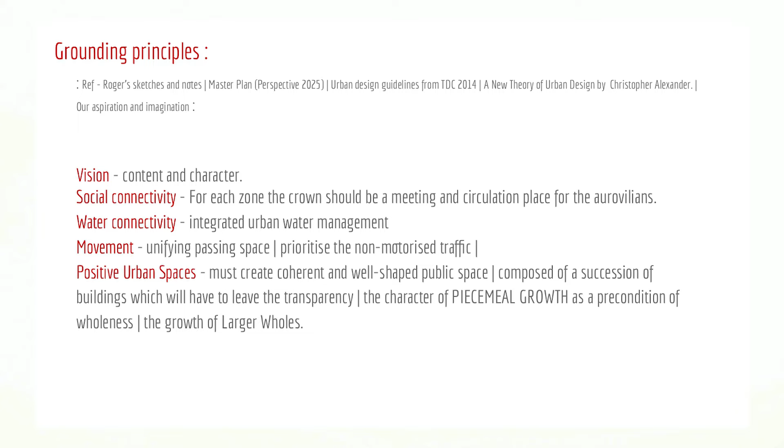Starting with the grounding principles, more about the content and character, which is not only about the road along the crown, but all the projects that come along, the spaces that come along, social and water connectivity, because we have emphasized a bit on water in our coming slides.

Movement, we're looking at this more as a unifying passing space and not as heavy traffic on the crown. And looking at the urban spaces, we are basically saying create more coherent spaces and let the projects or activities which come along the crown relate to the larger whole, and not look at it only as piecemeal in itself.

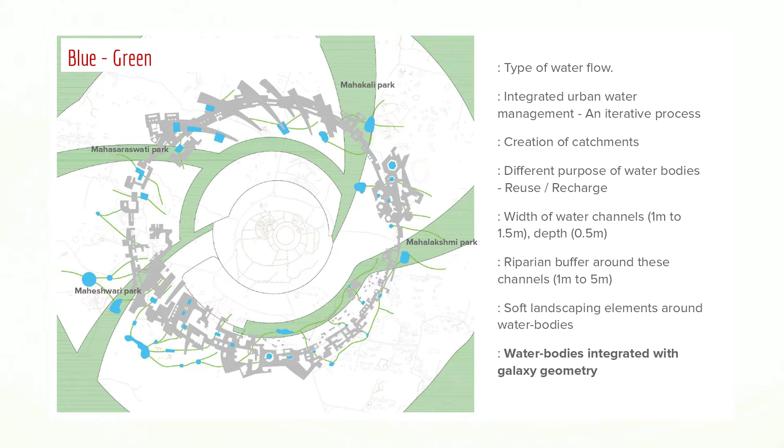I won't go into details because we touched upon this last time quite a lot. Just a quick thing, we looked at the water flow, the way it is flowing, and according to that we kind of created different water catchments. These could be either reused or recharged depending on the kind of development around. The idea is to create soft landscaping elements around those water bodies so they're not left alone, but maintained properly.

Based on the feedback last time, we tried to look at the geometry and put the water along that. So what you see here looks very rigid as a form, but when we go into the details it will look a little different. Anyway, we're looking at the galaxy more as a geometry, and we've been so flexible all this while, so we have taken little liberty.

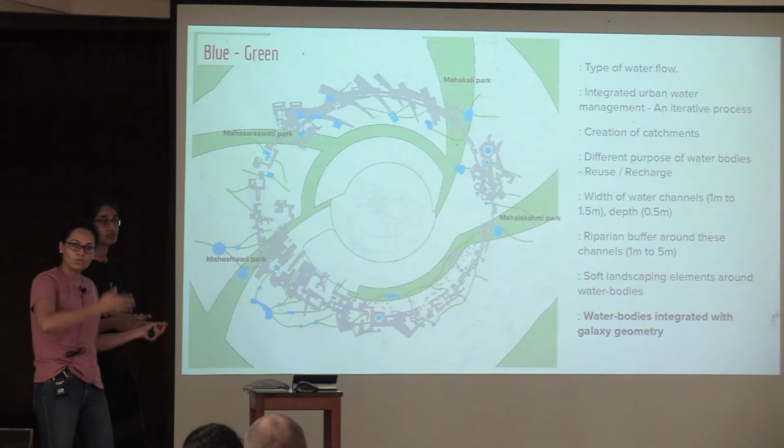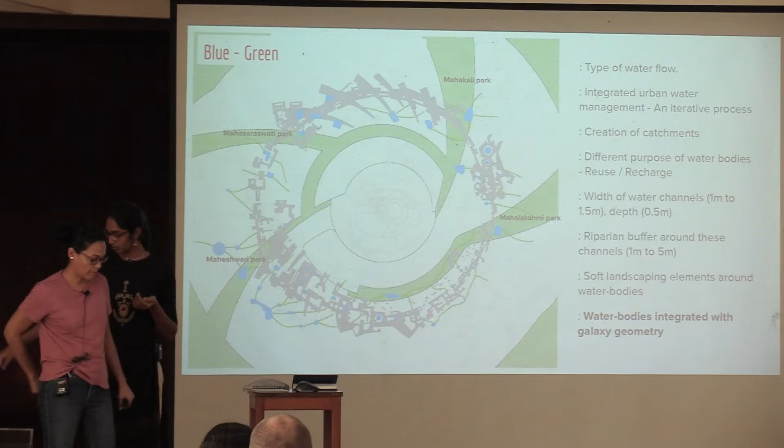Somebody pointed out in the morning that the water in the galaxy is looking different, more flowing and everything. So what we can do is move towards that, because we will be having more density and the runoff will be much higher. So we will work out a different strategy that will evolve as we are developing.

On movement, we won't go into the details because Fabian has already touched on it. There is one thing, looking at the crown more as a continuous experience and less of a vehicular one. You will see that different details we have worked on would actually show more of that.

The place where we have done it differently is here. We are not making this motorized at all, but going around it, and we'll come to that when we are actually detailing out that stretch.

Just a quick thing, sector 3, 4, 5 in the residential zone is cycle path only. Then we continue as a vehicular road. Through Darkali, till the end of that little radial coming in here, is only cycle path. This is Darkali. Going further here was again vehicular. Sorry, I'm so used to saying motorized, but I think vehicular is the better word.

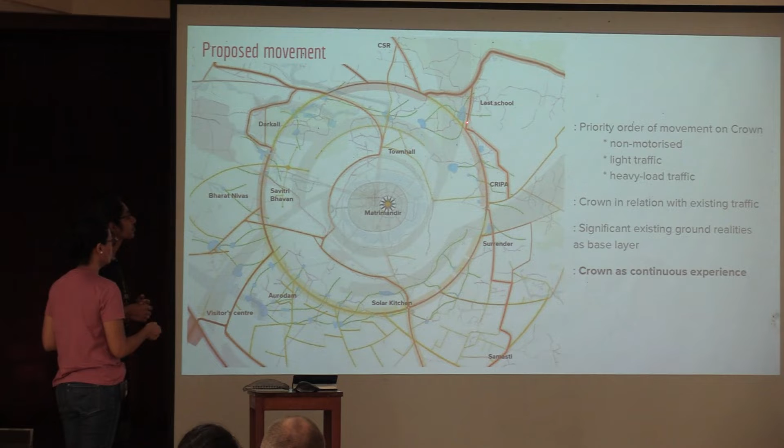But also we had said that we could try and time out the access to this, and in the evenings throughout the night till early morning it could be closed for vehicular traffic, so that at least evening life could be experienced without much cost involvement.

So looking at the human experience basically, the kind of spaces we've created all along, we're trying to see how we can experience the crown. When you come to the junction of Matrimandir Visitor Center, there are tourists there, and also a kind of diversity where it's an initiation for many people. Going further is the archaeological site, so it's a kind of connection with the past.

Then you pass through Darkali, which is basically about being with nature, building a relationship with nature, different forms of life. Going further is a kind of exchange - there is trade, this is the industrial zone. So trade of nature, there would be a lot of learning spaces, interaction spaces.

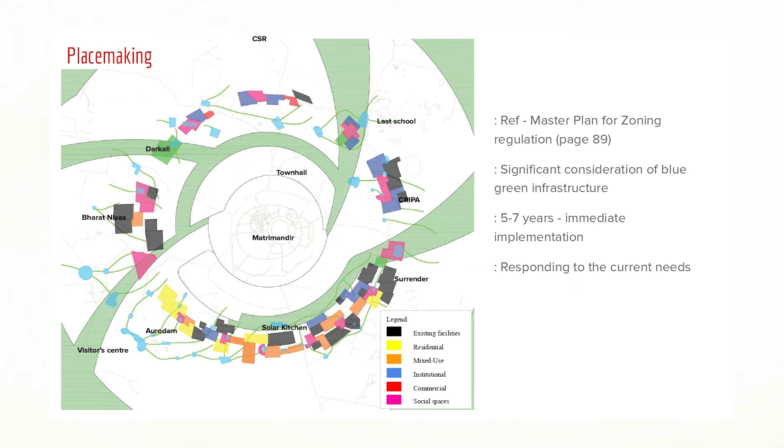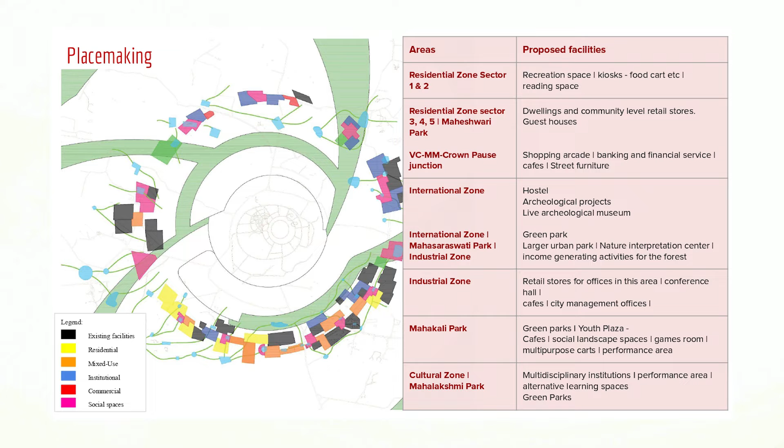We had basically said that we are looking at only 5 to 7 years. We've referred to the master plan document and Roger's sketches, and looked at the current needs also. These are different proposed facilities that we touched on in last presentations, so I won't go into details. We picked a few which make more sense in the next 5 to 7 years that can be immediately implemented.

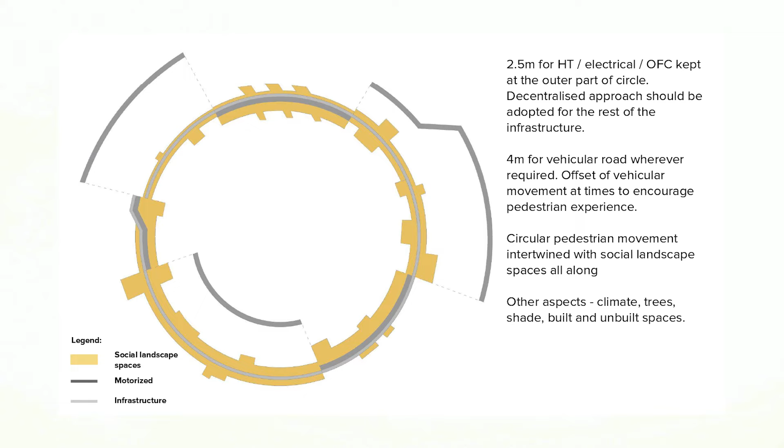Last time we tried to look at 16.7 meters as right of way and worked around that. Within there was flexibility that we had kept between 2.5 and 3.1, those numbers you all know. We tried to rearrange them, and the aim at that time was to see how we could give social landscape spaces more priority. That still remains, but over the last 2 weeks we had detailed contemplation and also a lot of feedback that we got last time.

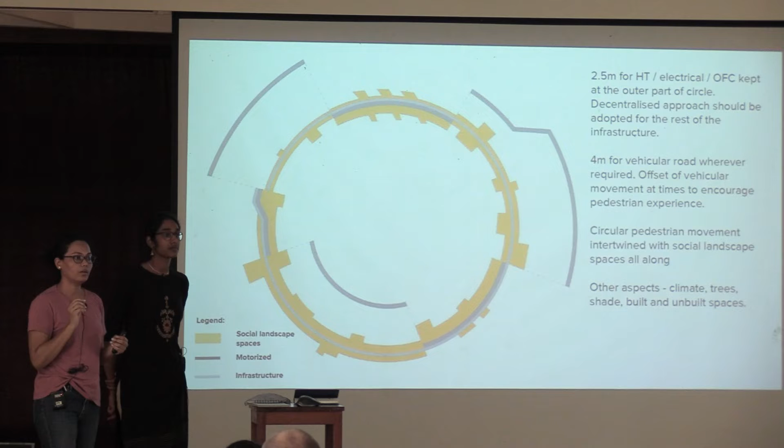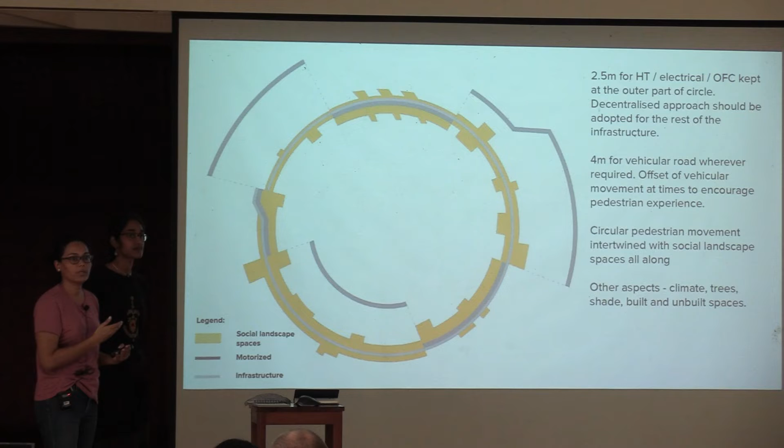Now what we're trying to do here is actually fixing 2.5 meters as the infrastructure corridor, mainly for the HT and LT line and maybe OFC also, because we need that ring as per the electrical master plan, so that could remain there. But we felt that to give the kind of experience we're talking about, if we clear out that 16.7, we are losing a lot. That also got confirmed by the presentation we had, so basically we do the other planning first, and infrastructure would fall in place according to the planning that you make.

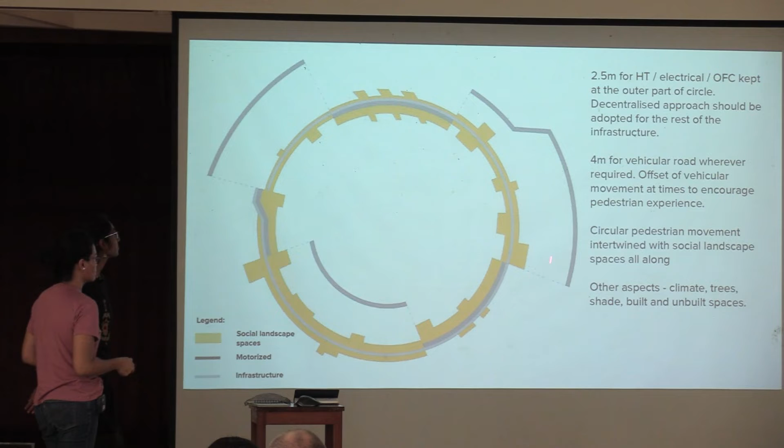Assuming that water and wastewater would be decentralized, they would still have a place in that 2.5 meter ring where you could at times plug in and facilitate along the crown. What you see here is basically the darker gray, which is vehicular at 4 meters, and that's not always along the crown ring—it is going in and out. This is of course conceptual, so it's at times in, at times out.

The other aspects we are trying to cover this time are through different plans and sections of many of these, where we are looking at the climate, looking at the microclimate, appropriate trees, and placements for shade, for built and unbuilt spaces.

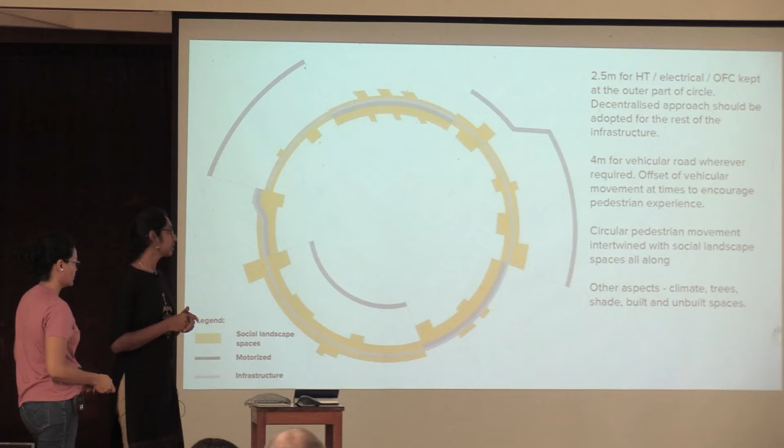The main essence of it is that 16.7 was constraining us a lot and creating unnecessary challenges. So what we try to do is keep that flexible, and like somebody mentioned, widen the crown even more—the crown is more of a people experience. So we give more emphasis on people's experience here. That's why the social landscape spaces are way larger than just the passing space. We try to create social landscape spaces every 200 meters, so from any point within a 5-minute walking radius, you will land up in a resting space.

So to start with the residential zone, sector 1 and 2, which we connect with a lot—in this area we try to see first how the sun is affecting the area, and if we have a wider road, how that is actually affecting it, because we experience it every day. With the 4-meter road, which is already existing, and then there is a 2.5-meter infrastructure corridor that will go, the rest of the space on the other side becomes a space where the buildings are set in, set back, and create spaces and all those things.

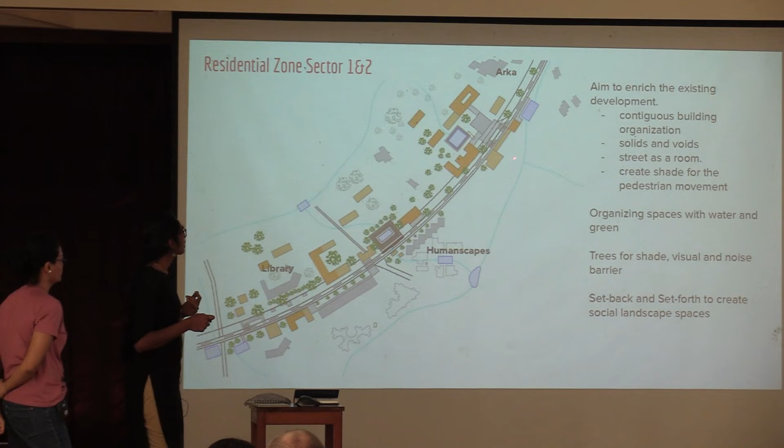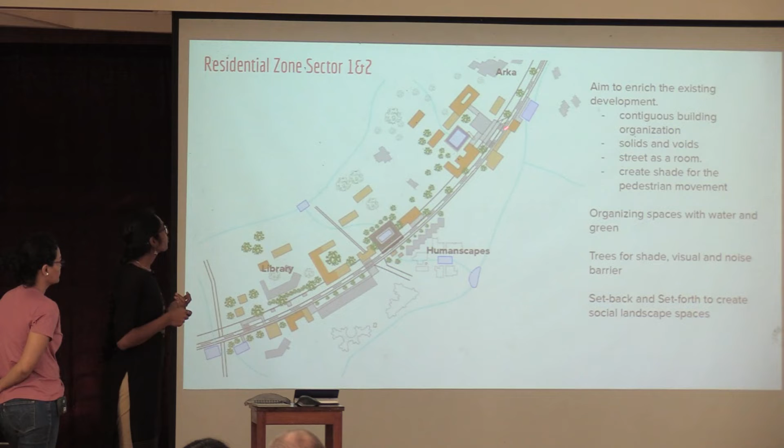Here if you see, there is a courtyard-like space which we also tried to get from the galaxy—there were nice courtyards falling on the center of the crown. We tried to create those kinds of things with shade elements. For example, this is the road that we said will close after 5. There are several of them in different places, in different forms—when we close them, that space can be taken up by something else, and there can be an activity. So it's really a room in the street.

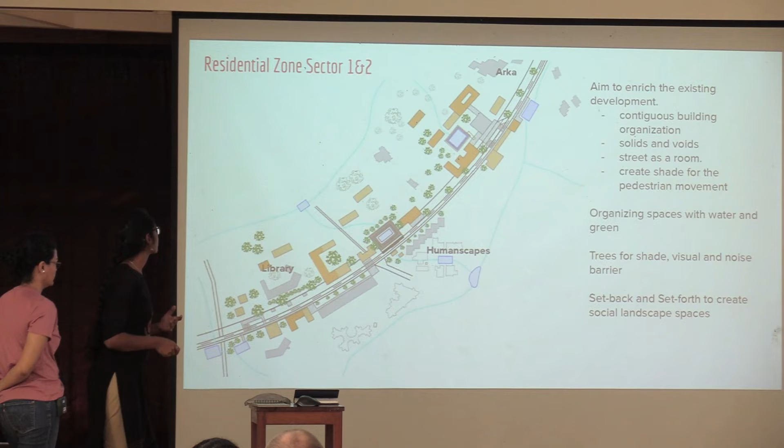As we go along here, this is humanscape, and then there is another water body coming there, and around that is kind of a stepped environment, which is again a seasonal water body. When there is no water, it can be a nice interactive space, with some performances happening and all those things. And here if you see, it sits forward in that space—it does not come on the road but sits forward.

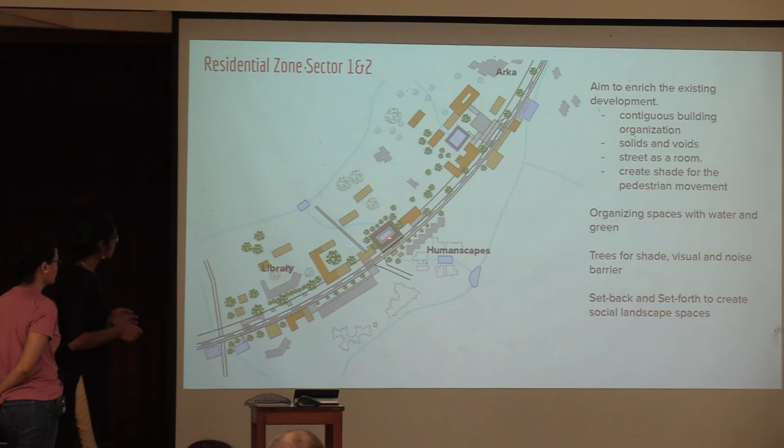So in the evening, the road also becomes like the whole space, and there is no curb that we are thinking of. So here's another courtyard, and then this is Kalpana, and there is a colonnade already going, with some trees.

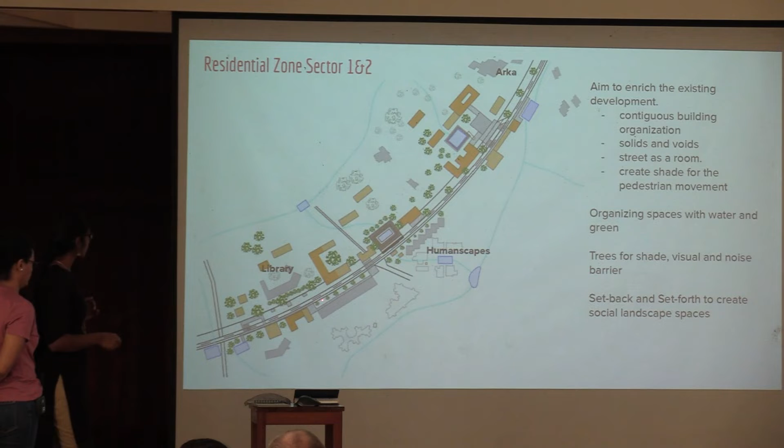Here we second the point that Ganesh mentioned, that instead of looking at avenue trees, we use trees for how they can help, either as a visual barrier, a noise barrier, or to provide shade - all those kinds of things we have explored.

So here is another courtyard. Around evening there can be some small kiosks put up, and it can be totally different, and then it becomes a road again. So that was the idea here.

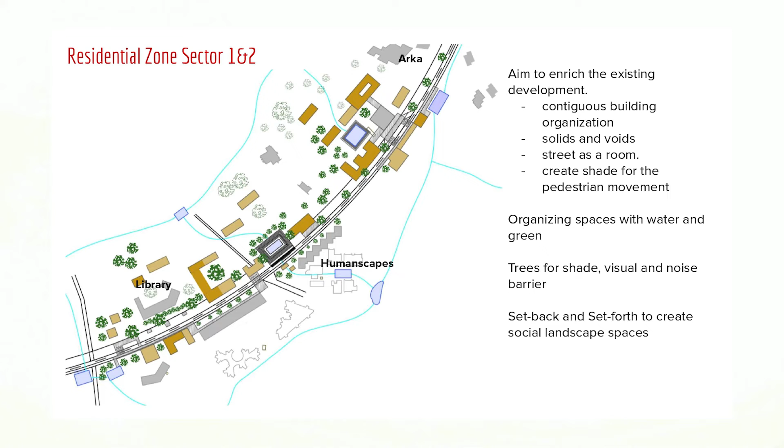In this stretch, knowing that north is up, we all know that this road has always been very sunny. So what's important is to build across and close-knit, have trees that give shade and noise barriers, etc. That's very important climatically, to organize those spaces, to make that stretch of road more usable - like we say, street as a room.

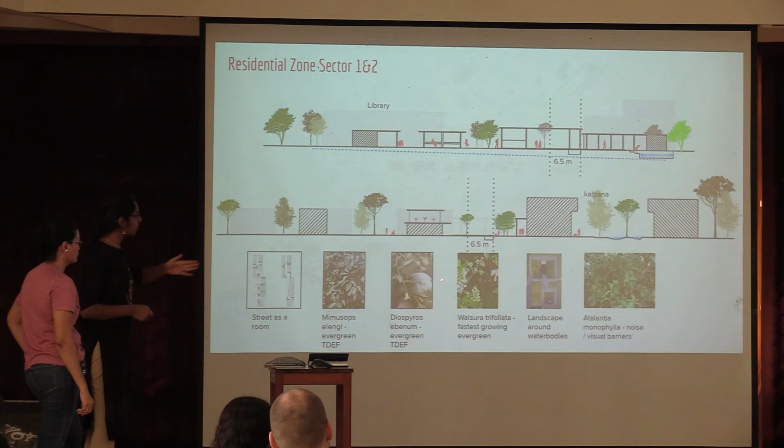That's another exploration. We also tried to explore some of the species that can be used for providing shade, which are evergreen and TDEF species, which you will see here. Thanks to Glenn and Gislin for helping us with that.

Another thing is, in these spaces that we have created in front of Humanscape and in front of Kalpana, during this monsoon there were, for 3 days, water above the crown actually. So that clearly shows that we have not made ways for water.

So here, instead of undoing the road and redoing it, we can let the water flow on the crown, and we make a nice small dip above. So the water is flowing, mongooses can cross, and all those things can happen.

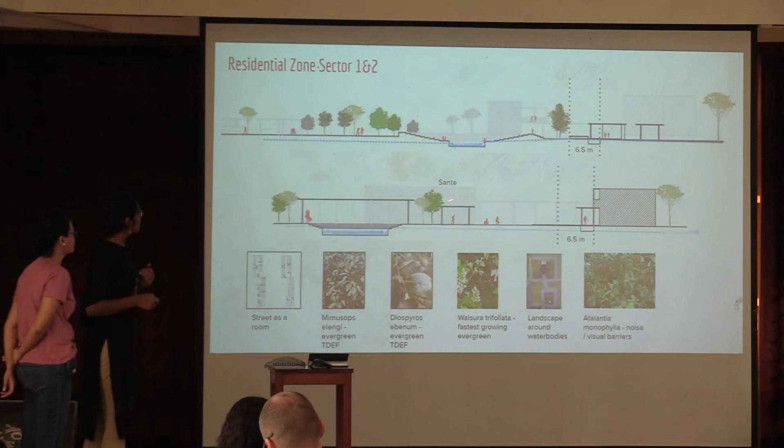This is near Sante. Again there is, in the background, the street as a room happening, and then the infrastructure corridor can be covered with shade elements.

So this is sector 345, and here somewhere is PTDC and solar kitchen. So you see, this is all adopted from the Galaxy model.

And the nature of the social spaces we are providing every 200 meters is not always active - not like something is always happening here. So we are looking at a scale where it's very active, like in sector 1 and 2, to a scale where it's only a simple banyan tree with benches around, where you have a place to sit, introspect, and have your own time.

And there is big potential in these spaces, from today to how it will develop tomorrow, that as the density is growing, as the needs are growing, they can also be transformative. So today it can be very simple, tomorrow there can be active life around it.

So here we are saying only cycle path, and a little raised cycle path allowing the water to go through, because this road doesn't exist now. We're not redoing anything - we can do it as we allow the water inside.

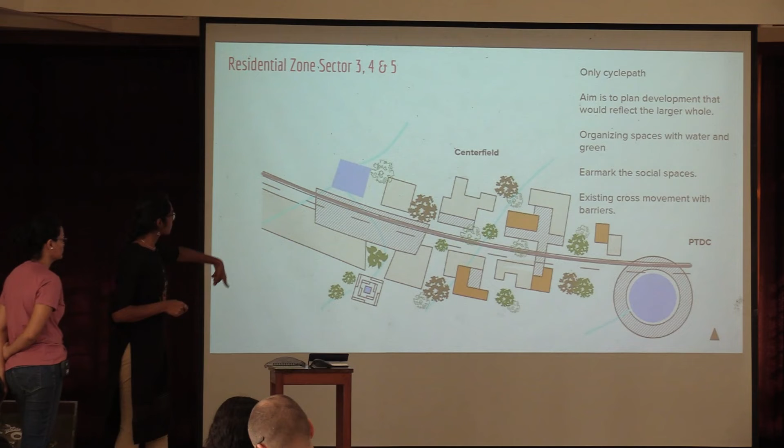And whatever traffic is crossing from here to the communities that are here, the Aurodam and other places, will not be able to cross through or run on the crown. We will have barriers that will cut them off.

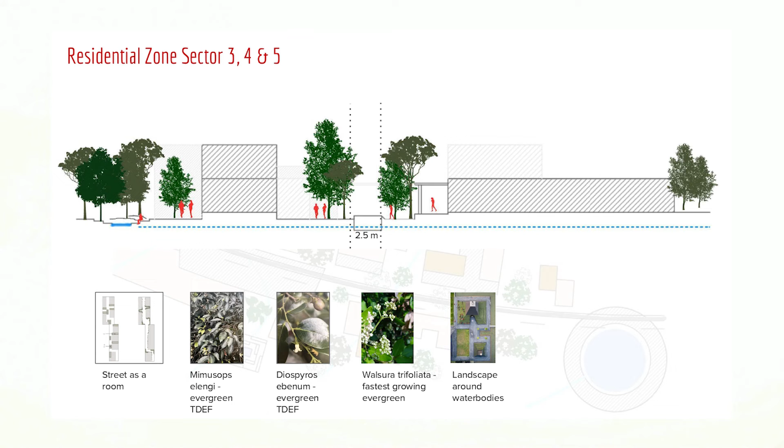Section, and there is a lot that we can do. Here again the water bodies are in and out. As it is along the crown, it can be more active; as it is away from the crown, the nature is more calm, more intimate, and those kinds of things.

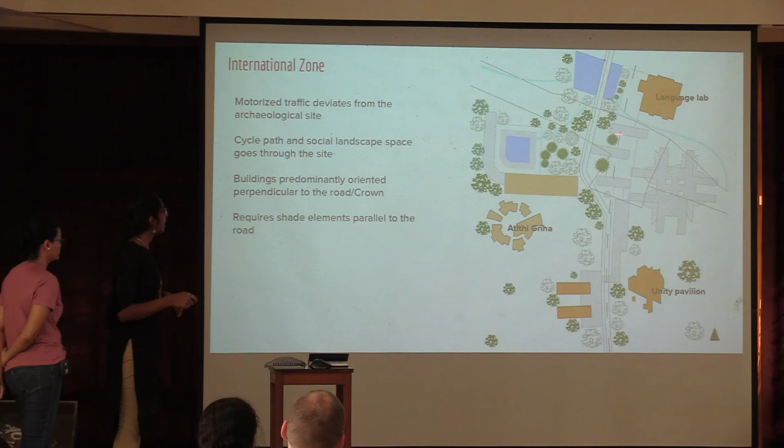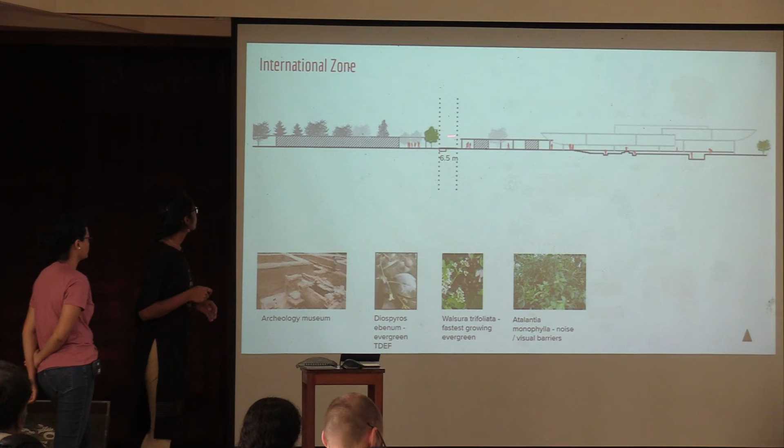So coming to the international zone, we have taken this area from Unity Pavilion to Language Lab, which has a very significant space of the archaeological site. So here we are saying, go to the section - yeah, this is again the 6.5 continues.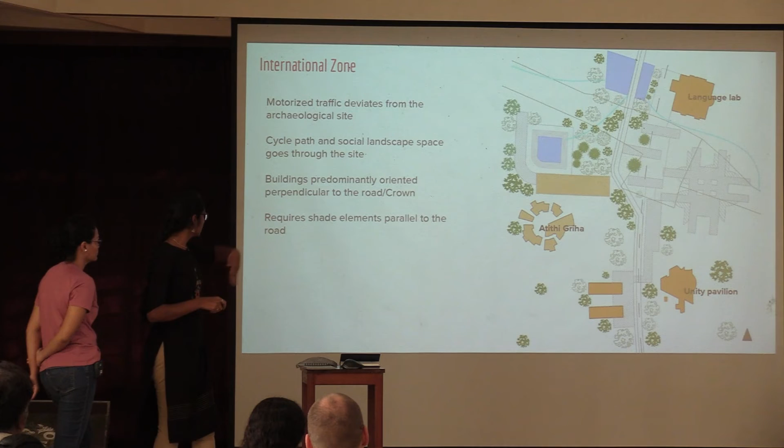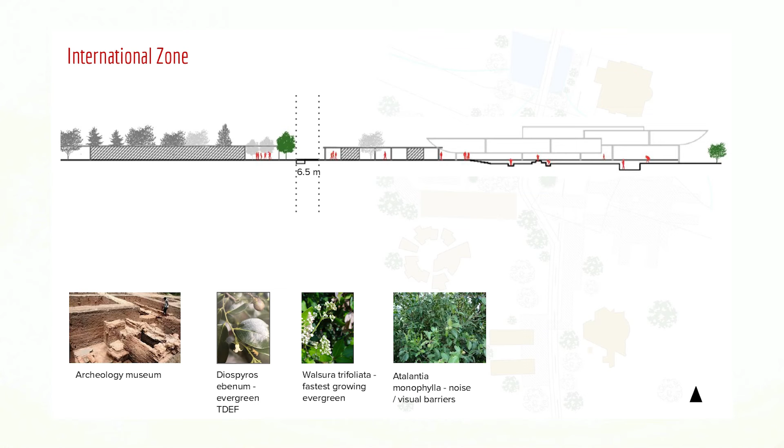The important thing is because we have the area of importance, we have this little deviation of the motorized road, but still the cycle path and the walking experience continues along the crown. This is to respect the area, and we could easily make the archaeological site part of the social space. We have this kind of underground experience with the live museum and everything.

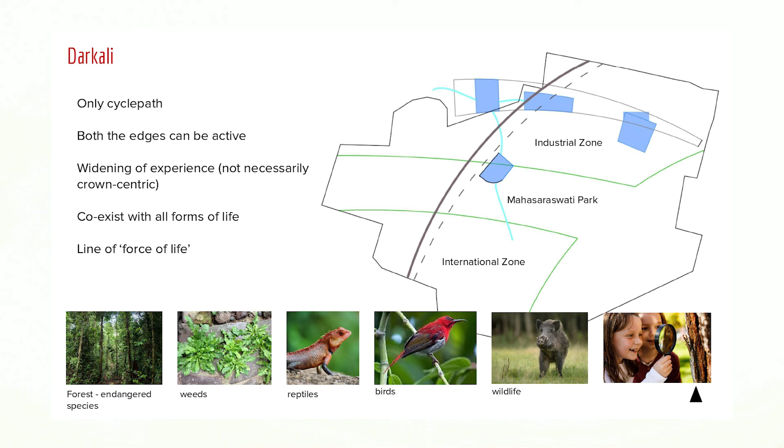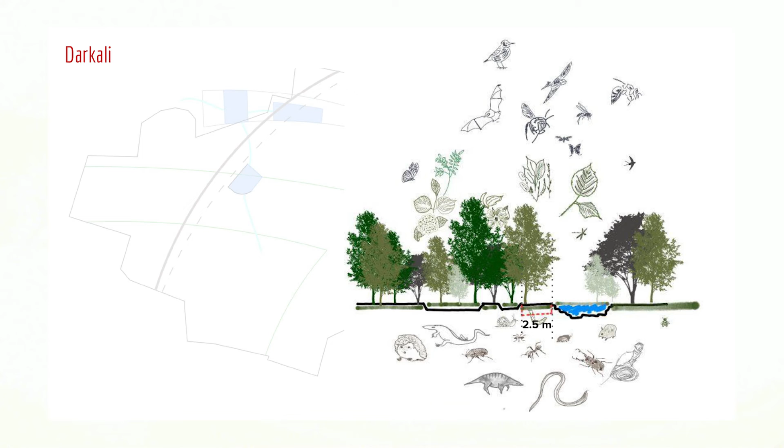So Darkali, as we go, the main idea is to keep the edges active with activities happening in the industrial and international zones, and keep only the cycle path through, because if we do much here we disturb the ecosystem that is there. But it's an enriching experience for us. So we're doing as minimal as possible and trying to coexist with all forms of life, not just trees, because they all play a huge role in our ecosystem balance.

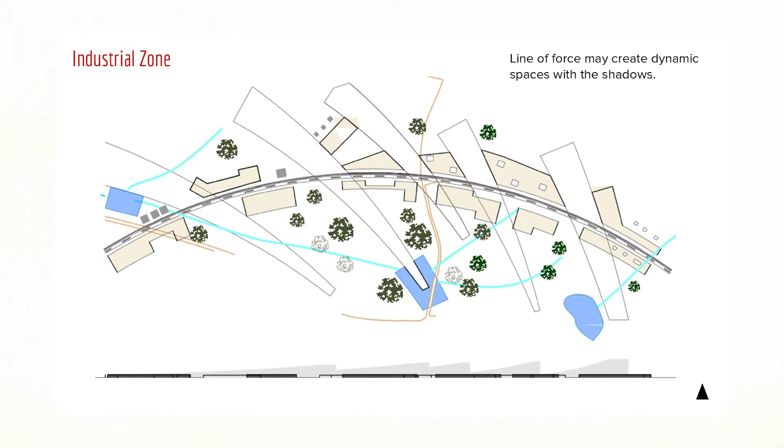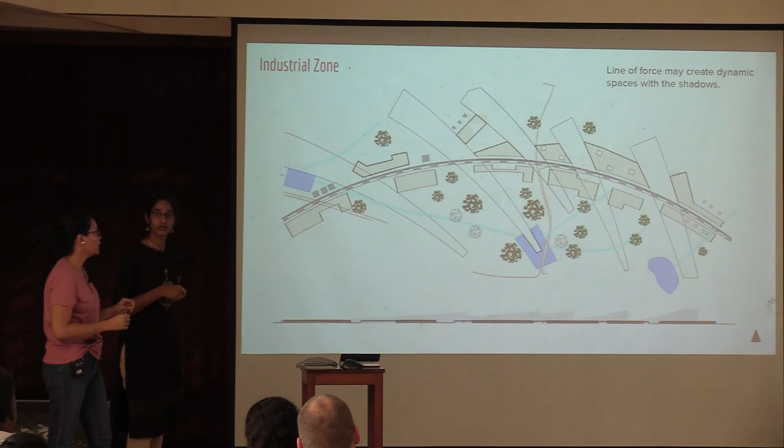Coming to the industrial zone, I think many of you have done this. Don't look at the number of lines of forces, it confused us too since at times it was 4 and at times 6. What we're saying is basically the low-lying buildings along the crown could come up now, and this stretch of road could be developed pretty soon, because along with the interlink that Fabian talked about and the industrial zone access, we could start developing this and give it urban form, since the lines of forces are creating a positive impact on development along the crown.

This is just a skyline that it would create. The way it's shown right now, it's very solid blocks, but if we give the porosity, it can be done very interestingly.

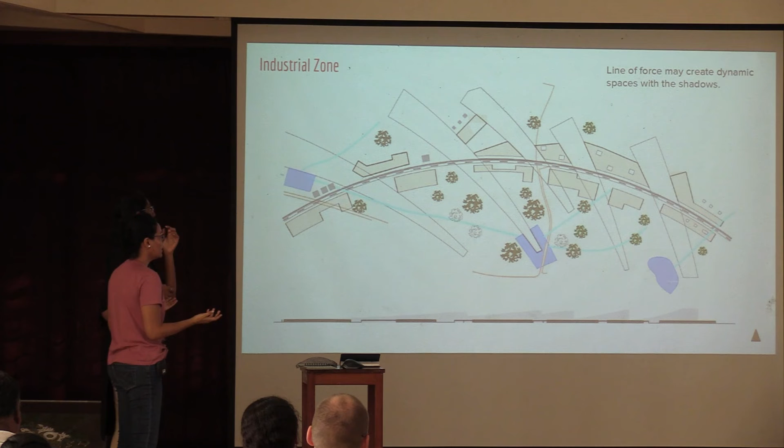So spaces-wise, as we said earlier, we could bring offices and collective spaces which would cater to the industrial zone, like retail stores and courier services, and also borrow from different zones to create a nightlife here, like Shivangi and Radhika had talked about.

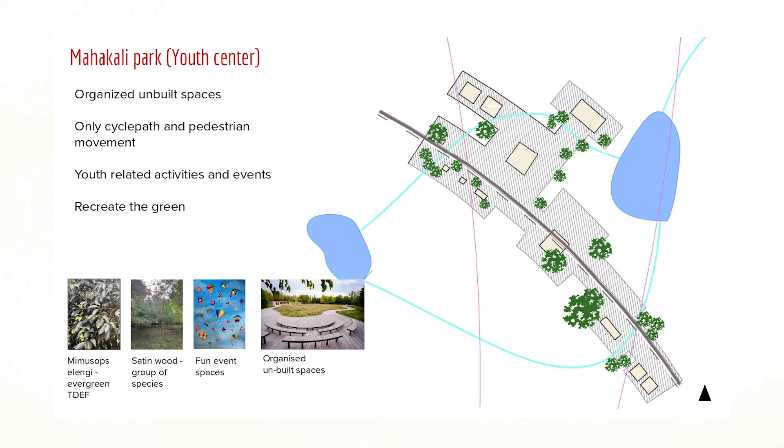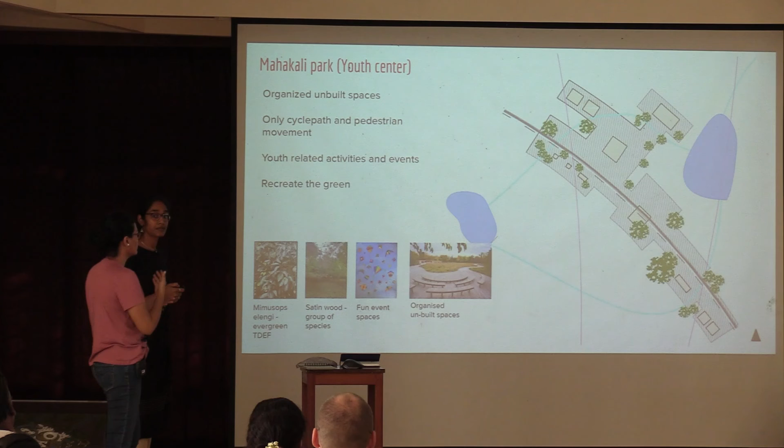Here, what we are focusing on mainly is creating unbuilt spaces, but organizing them in a way that responds to the footprint and to the need of what actually existed there. So when we say youth, it's not only restricted to the youth center, but could be enlarged in a very beautiful manner. We could create spaces for events and activities that are youth related, or even otherwise.

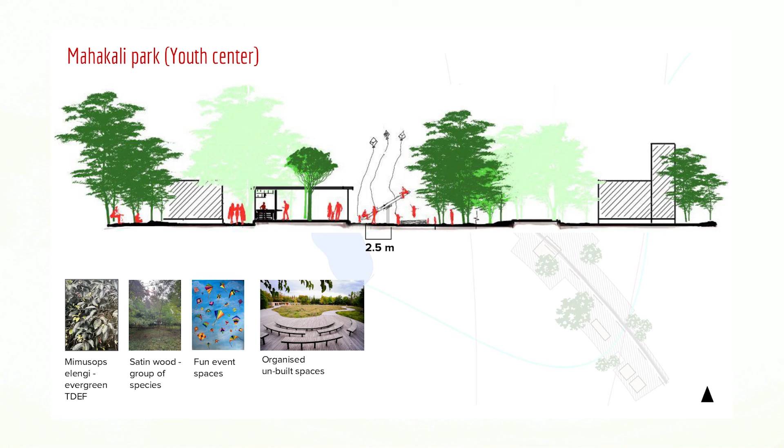We are talking about this stretch more as just a cycle path. That's the section which is 2.5. It stays because the HT ring and electrical stuff can go through that, and other things could plug in and go through there if required. You can see the way these spaces are, they could be very semi-open spaces with tree shades and stuff like that.

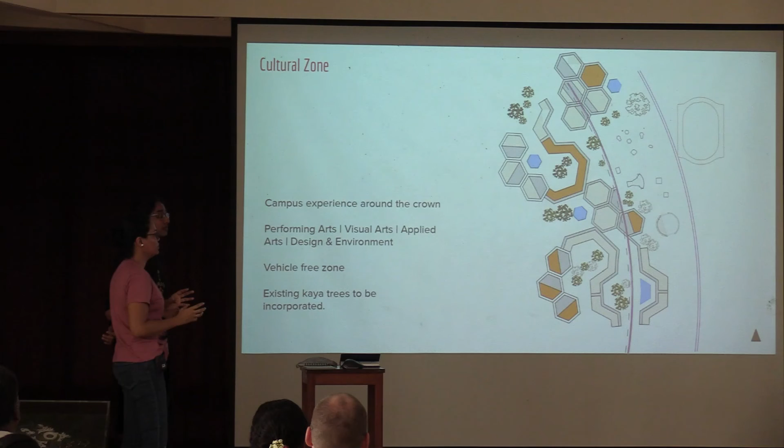The cultural zone is where we are saying we could develop this whole stretch more as a campus. That's why we are sticking to just the cycle path and pedestrian path along all this. This dotted line you saw all along was 690, with a vehicular road offset a little on the outer side. So you can see this is Kripa, and that's Kalabhumi. If you see the scale of the hexagons, we're not talking of something very big.

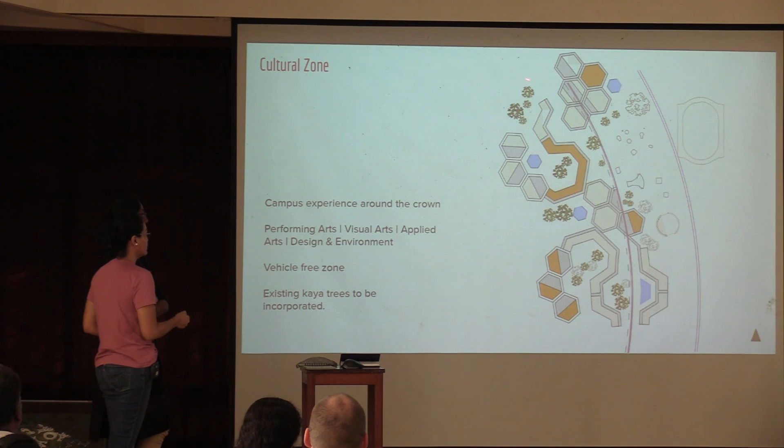There are a lot of existing kaya trees here, so it will be challenging to see how we incorporate and actually build into those. That's going to be very interesting. So that's the section through there.

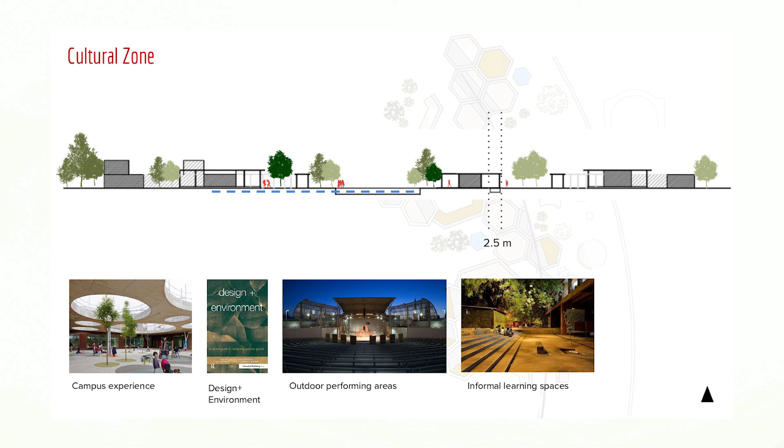What we're saying is 2.5 again stays here. The water flows along and could become social spaces, meeting spaces. These are just some pictures from different campus learnings. There can be night street plays happening right on the crown. So when it's not defined, we can define it with activities rather than with space or any enclosure. That is also a possibility.

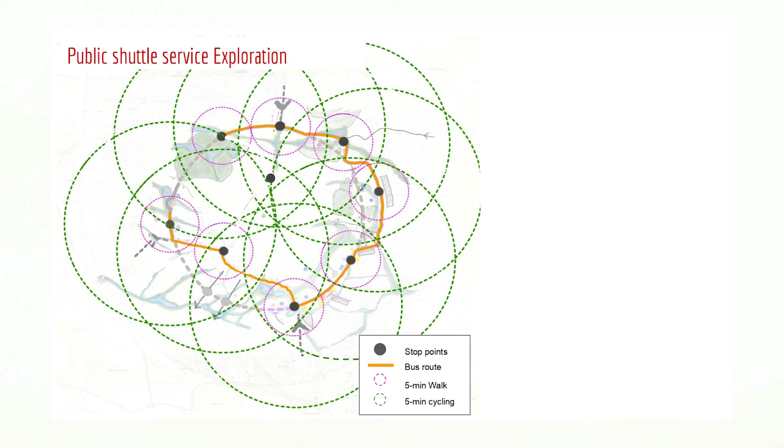This is the public shuttle service exploration that we had done last time. There was a lot of appreciation, so we put it here. The main things are the shuttle route and the stop points. Dots are the stop points, which have the cycle pool allowing you to go explore further in the zones and then come back and take a shuttle again. The pink lines are the 5-minute walking radius from the drop points, and green lines are the 5-minute cycling radius. Pretty much the whole city area is covered from these drop points within 5 minutes of cycling.

Yeah, I think that's all. That's all.